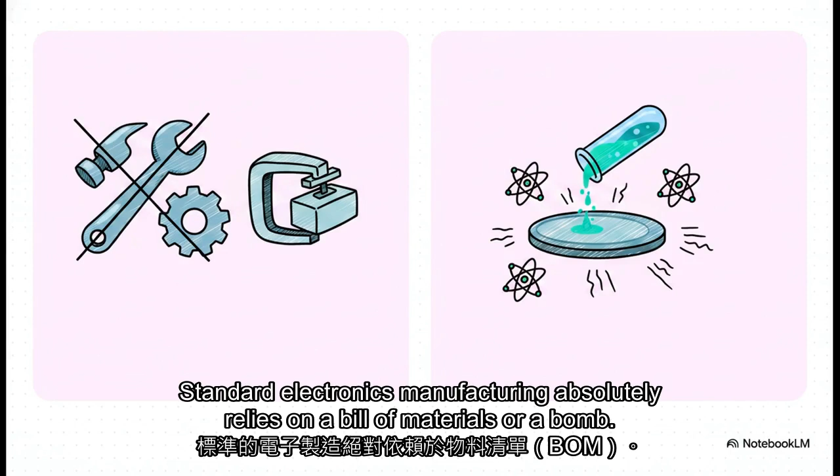Think about the contrast here. Standard electronics manufacturing absolutely relies on a bill of materials, or a BOM. You need resistors, capacitors, and physical clamping tools, jigs, to hold the whole thing together. But the semiconductor front end, it's entirely different. It starts with a raw silicon wafer, and honestly, it ends with that exact same wafer. There's no traditional BOM, there are no clamps holding pieces together. Instead, it's this incredibly complex, discrete process completely governed by physics, chemistry, and optics.

And here's the real kicker. During this entire front-end manufacturing process, there are absolutely no electrical properties, none. It's simply raw material manipulation until the very end. So, if we aren't snapping electronic pieces together, what exactly are we doing?

This brings us to Section 2, building the silicon high-rise. The absolute best way to visualize a microchip isn't as a flat puzzle, but as a towering skyscraper. Because we want to pack as much computing power as humanly possible into the tiniest volume, we have to build vertically. We construct this silicon high-rise layer by layer. First, we lay down a pattern of what will eventually become an electrical circuit. And then, we seal it with an insulating protective film, like an oxide layer.

Then, we build the next floor of circuits right on top of that, insulating it again. We just stack and stack. But remember, as we're pouring the microscopic concrete and steel of this building, there's no electricity running through it yet. We're just physically structuring the layers. Now, how do we physically build these microscopic floors?

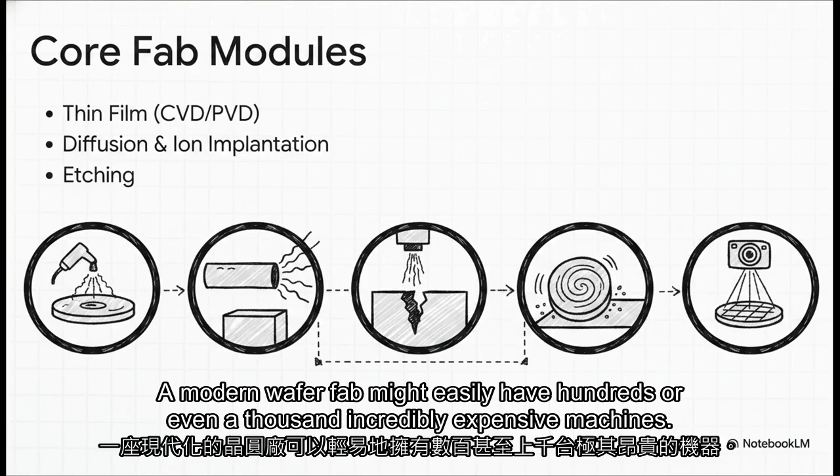Let's move to Section 3, the 5 core modules. A modern wafer fab might easily have hundreds or even 1,000 incredibly expensive machines, but practically all of them fall into one of these 5 core processing modules. First, thin film deposition, which lays down those foundational layers. Second, diffusion and ion implantation, which alters the silicon's properties. Third, etching, which carves out the actual structures. Fourth, CMP, which polishes the wafer flat. And fifth, lithography, which is the crucial optical step.

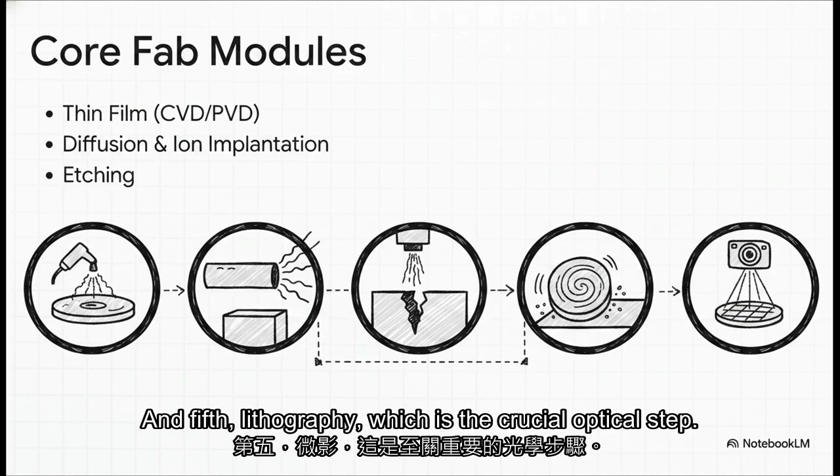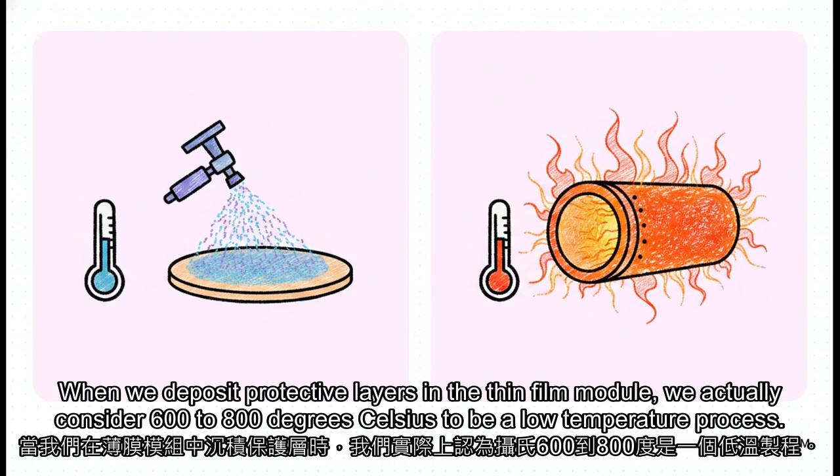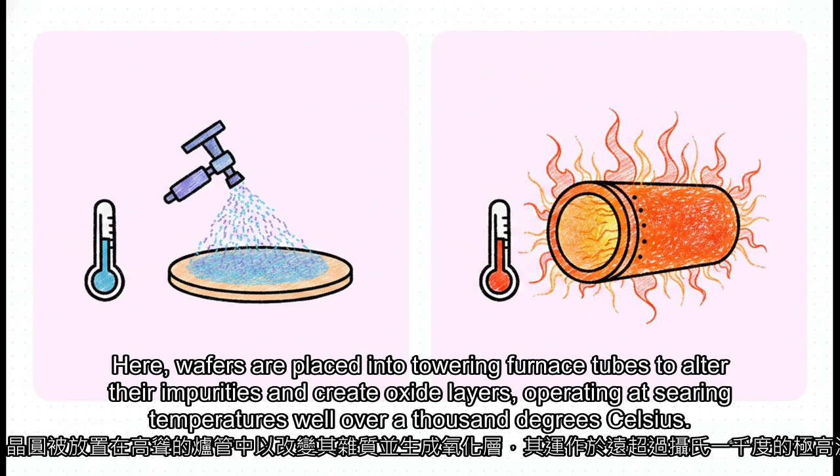Now, what's really fascinating here is the sheer extreme of the physical environments we're dealing with. When we deposit protective layers in the thin film module, we actually consider 600 to 800 degrees Celsius to be a low-temperature process. Compare that to the diffusion module. Here, wafers are placed into towering furnace tubes to alter their impurities and create oxide layers, operating at searing temperatures well over 1,000 degrees Celsius. The physical stress these raw wafers endure is just staggering.

Let's see how this builds into the most critical partnership in the entire factory, in Section 4, lithography and etching dance. If thin film and diffusion give us the raw concrete floors of our high-rise, lithography and etching carve out the rooms and hallways. It is a highly precise 4-step physical dance. First, the wafer is coated with a light-sensitive chemical called photoresist. Second, it's exposed to intense ultraviolet light through a patterned mask.

Third, we develop it, so the light either hardens the pattern or makes it soluble, depending on the specific process. And finally, in step 4, the wafer is sent to etching, where chemical solvents or physical plasma literally eat away those exposed underlying layers, leaving behind the precise circuit structure we want. The absolute star of this dance is the stepper, typically made by companies like ASML.

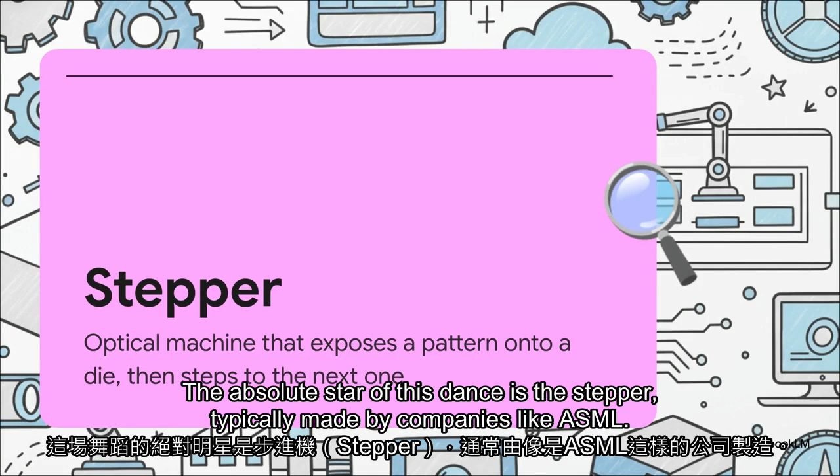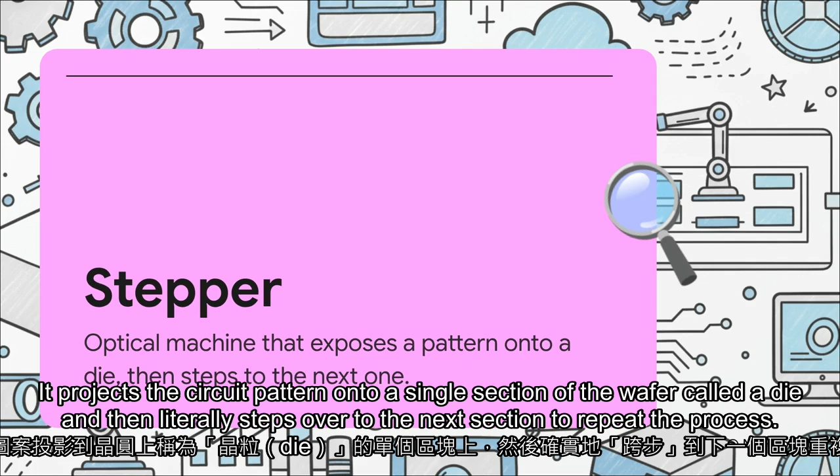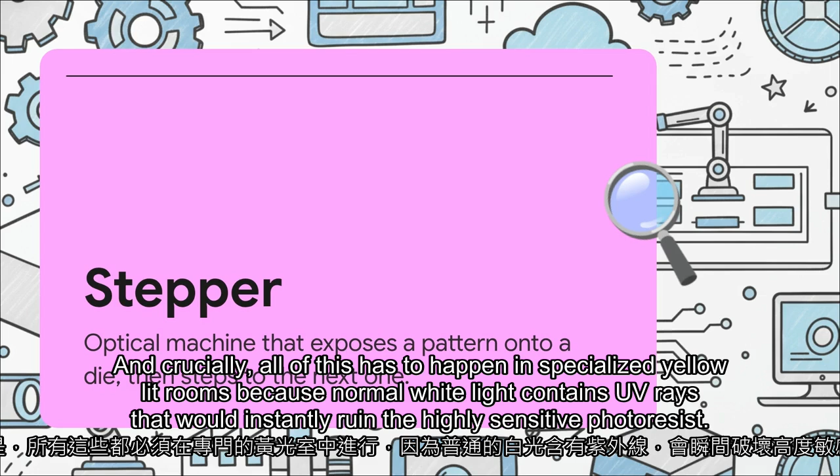This machine is a literal optical marvel. It projects the circuit pattern onto a single section of the wafer, called a die, and then literally steps over to the next section to repeat the process. Because the precision here is measured in nanometers, these massive machines actually float on magnetic levitation grids to eliminate even atomic-level vibrations. And crucially, all of this has to happen in specialized yellow-lit rooms because normal white light contains UV rays that would instantly ruin the highly sensitive photoresist.

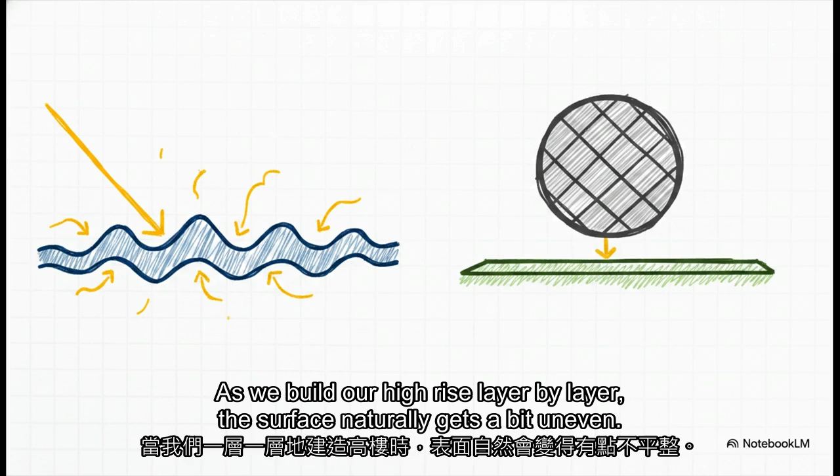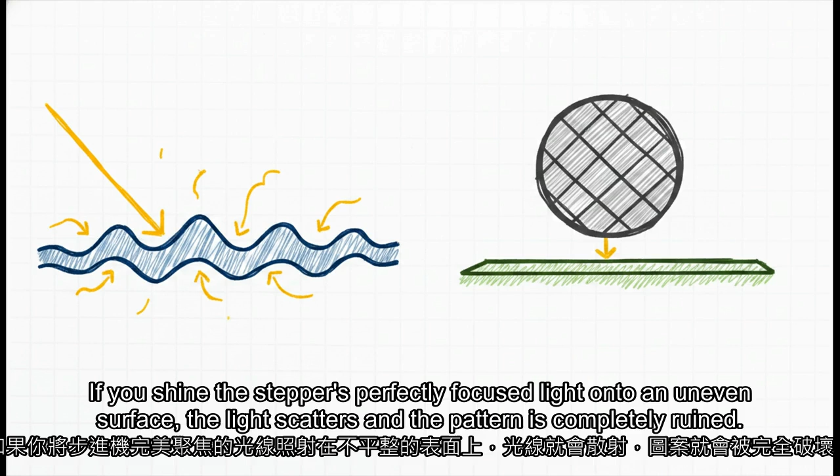But here's the catch. The stepper can't do its job if the surface isn't absolutely perfect. That's why chemical mechanical polishing, or CMP, is mandatory. As we build our high-rise layer by layer, the surface naturally gets a bit uneven. If you shine the stepper's perfectly focused light onto an uneven surface, the light scatters and the pattern is completely ruined. So CMP grinds the wafer back down to absolute microscopic flatness before the next layer can be drawn.

So, we've established the intense physical reality of the fab. Let's pivot to Section 5, the MES Software Challenge. Why exactly does standard manufacturing software fail spectacularly here? Well, it comes down to concepts like the multi-chamber machine. In a standard factory, a machine is just a machine. Product goes in, product comes out.

Simple. But in a semiconductor fab, a single machine might have 2, 3, or even 4 completely separate reaction chambers attached to it. Wafers entering the exact same machine might take entirely different internal routes. Physically, it's one giant piece of equipment, but logically and functionally, it acts like multiple independent machines simultaneously. And this setup illustrates exactly why this is an absolute IT nightmare for traceability.

Let's say a machine has 2 chambers. Chamber A is perfectly tuned and produces 100% good wafers. Chamber B has a hidden defect and destroys every single wafer it touches, yielding 0%. If your standard factory software just tracks the machine as a whole, it's going to tell you the machine has a 50% yield. That is totally useless in a fab. The IT system, the Manufacturing Execution System, or MES, must be custom-built to trace the exact chamber every single wafer passed through to isolate the exact source of a defect.

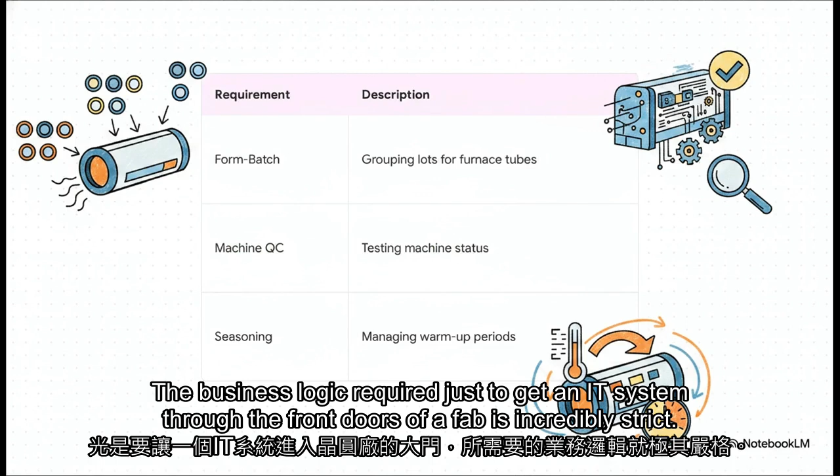The business logic required just to get an IT system through the front doors of a fab is incredibly strict. Just look at these unique requirements. First, you need form batching. The software has to know how to perfectly group 4 to 6 different lots of the exact same product and process to efficiently fill up one of those massive high-temperature furnace tubes.

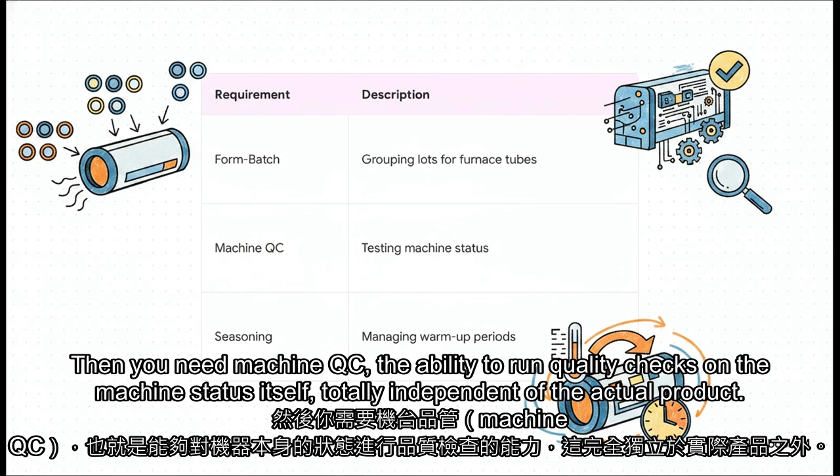Then you need machine QC, the ability to run quality checks on the machine's status itself, totally independent of the actual product. And you have to expertly manage seasoning, the really complex warm-up periods a machine requires before it reaches the precise physical conditions needed to process a live wafer safely. Furthermore, the software actually has to track wafers that don't even end up in a computer. These are called non-product wafers, or NPWs.

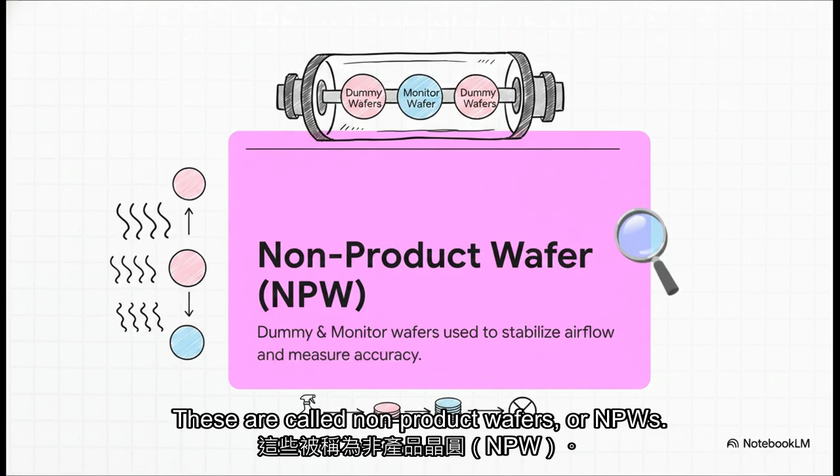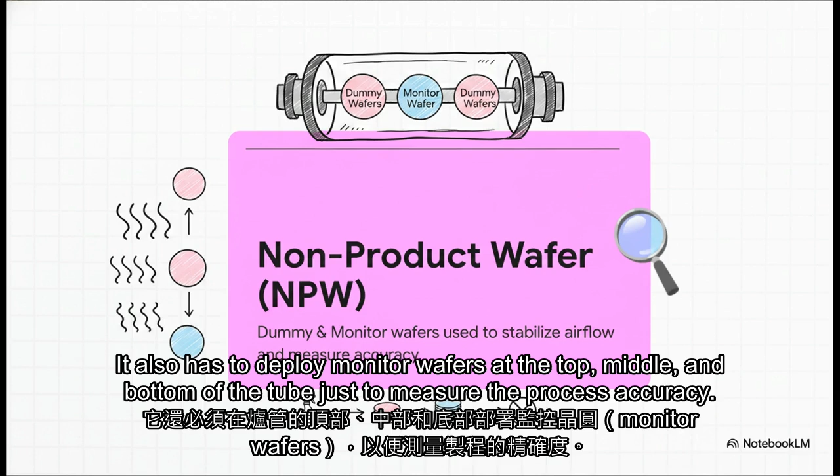For example, if a furnace tube isn't completely full, the airflow becomes unstable and ruins the whole batch. So the system must automatically deploy dummy wafers to fill the empty gaps and stabilize the air. It also has to deploy monitor wafers at the top, middle, and bottom of the tube just to measure the process accuracy. The IT system has to track the entire life cycle of these dummy wafers, how many times they've been used, when they need chemical cleaning, and when they must finally be scrapped, even though they will literally never be sold to a customer.

The cost of a single advanced stepper machine is easily over $100 million. The value of a single batch of advanced wafers can be astronomical. Because the equipment and the materials are so incredibly expensive, the system's tolerance for making a routing or processing mistake is practically 0. So the crucial point is this. You literally cannot run a modern fab with people walking around with clipboards. It requires complete unmanned automation and paperless tracking.

The control logic for simply moving a lot in and out of a multi-chamber machine is mind-bendingly complex. The traceability must be flawless, covering both the final products and those dummy wafers we talked about. The system stability must be absolute. Standard manufacturing software simply collapses under these specific, intense physical requirements.